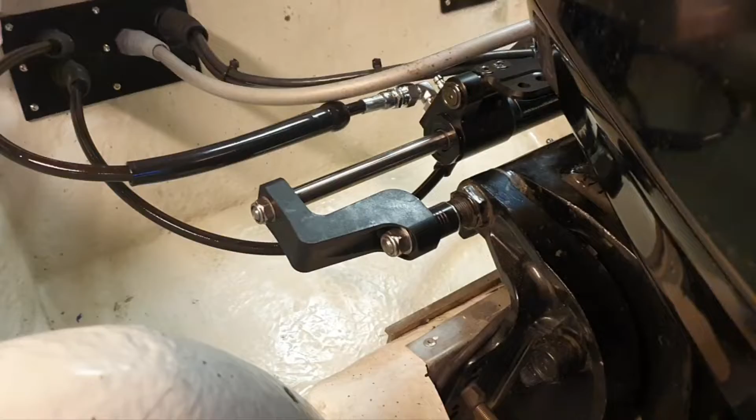Guys, if you came here for the how-to, well, I'm sorry. In this video you will see all the bad things you can meet on the final filling and bleeding of the installation of the SeaStar hydraulic system.

In the previous episode everything was fine - the cylinder installation, autopilot pump, helm pump, it was easy. We ended up with that in the previous episode. Here we're supposed to put hoses, pipes, fill the system and enjoy. Well, however, it's not the case.

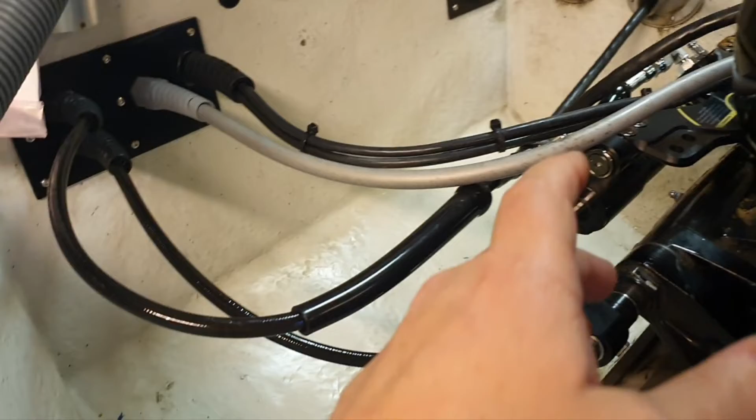Let's start step by step, from the hoses first. So guys, that's how I did strain reliefs for hydraulic hoses for SeaStar, and you can see the link in the description below where I did this panel. So I have electricity to outboard. Here will be a fuel hose.

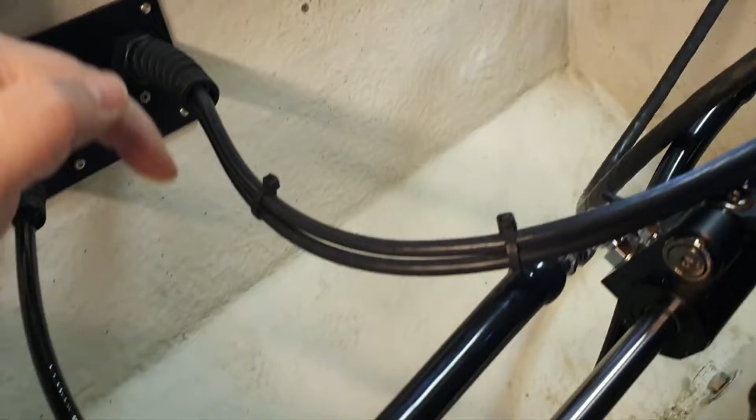See the link there. For hydraulic pipes or hoses, I have a concern. I figured out the best position for them, in my opinion. But still, because the original SeaStar hoses are not metal reinforced, let's say they are terrible. If you watched my previous parts, you can see how easy it is to damage them, how easy to bend them. So I have a big concern about this place where I fixed them. I cannot tighten them strongly because I'm afraid I will tighten too much and oil will not go through. And also I'm concerned that this frequent movement will finally bend and damage them. So it's really good to have metal reinforced real hydraulic pipes, hoses.

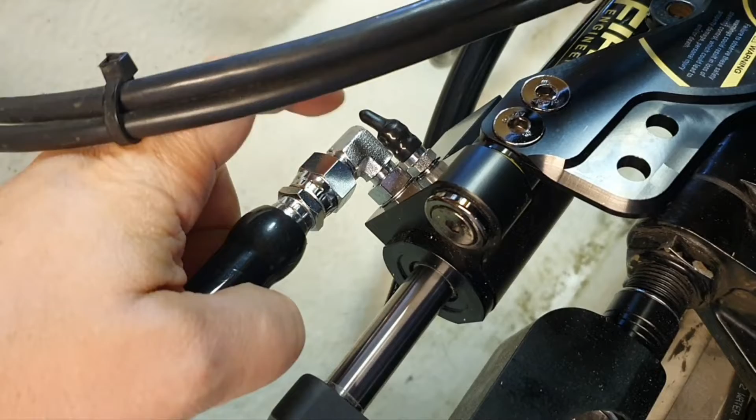So SeaStar supplies these Japanese hoses and they are, let's say, bad. I didn't put this strain relief here yet because I want to check for leaking in that part when I connect everything there. So otherwise, that's how it works here. Look, really nice, and everything would be good enough if these pipes were metal reinforced. Unfortunately, I realized too late how bad they are.

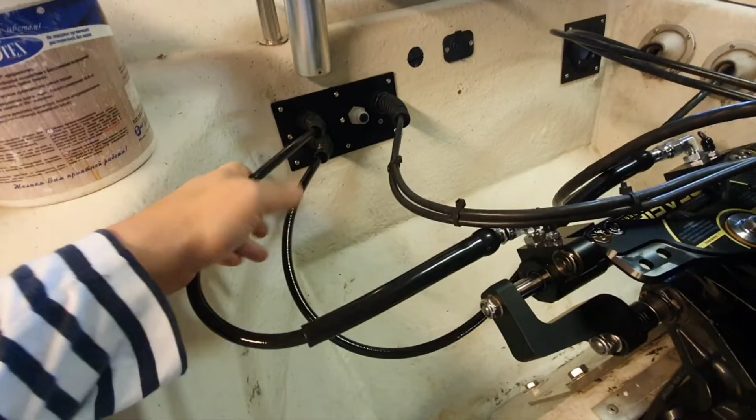Otherwise, I would never buy them actually. I would just buy the cylinder - this I liked a lot. And then I created my own hoses, but now it's too late. So let's see how it works. I hope no damage happens during driving. I think after one season I have to check the connection there. So that's it. Now I should go there, put the pipes through the side of the boat and connect it there.

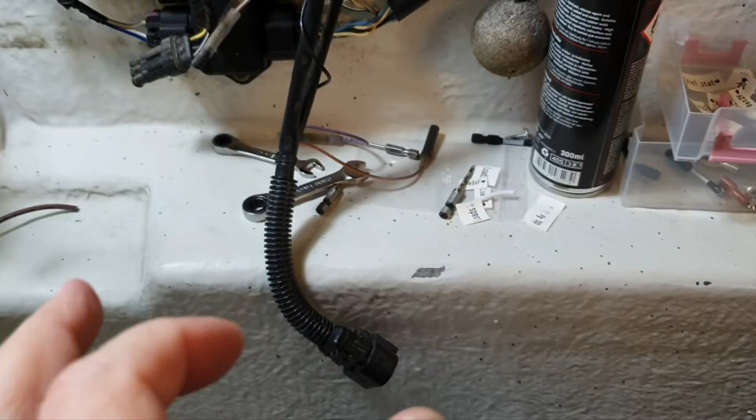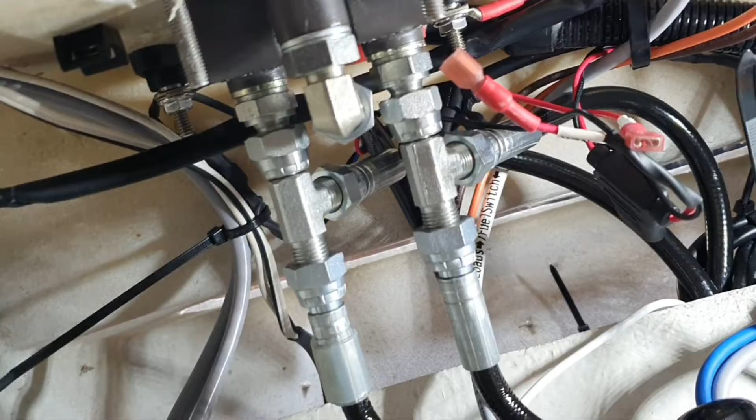So guys, I provided pipes or hoses there. Well, I don't remember what I said in previous frames because I'm recording this after a few months. I don't know what was recorded before and how I will edit it. But now I provided hoses here, installed the helm pump, connected all things, and here the challenges began. Those things are covered in the previous episode about this hydraulic system and autopilot installation.

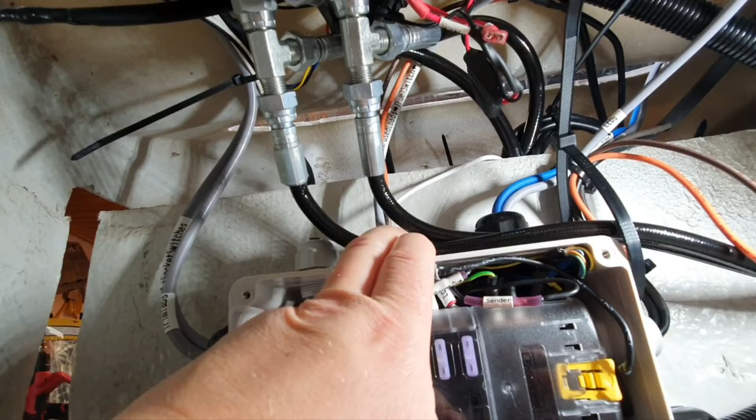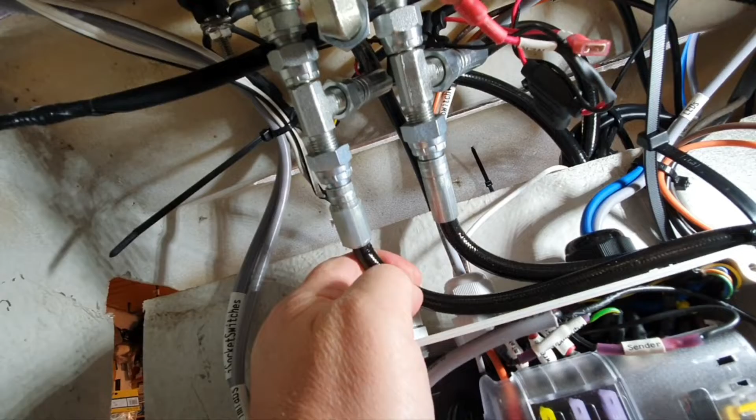So guys, these NITTA MOORE Japanese hoses that are included with this set are real junk. Well, if you don't believe me or don't want to believe me, I don't care, because they are real junk. I told you, and I have shown you - you saw in the previous episode how I damaged a few of them by just a little bending, and here again I have a problem, a challenge. I have this angle here, and they are jammed again, so they can stop the oil liquid from going through, because they are not metal reinforced - they are plastic, just plastic.

I have changed all the other hoses, the short ones - all this I have changed, and I made them here in Finland in Wurth. Well, it's covered in previous episodes, I don't want to repeat it, but this long one I decided, okay, I will not change them, just put these British standard fittings, and that's it. Well, it was a mistake - I would really need to change them.

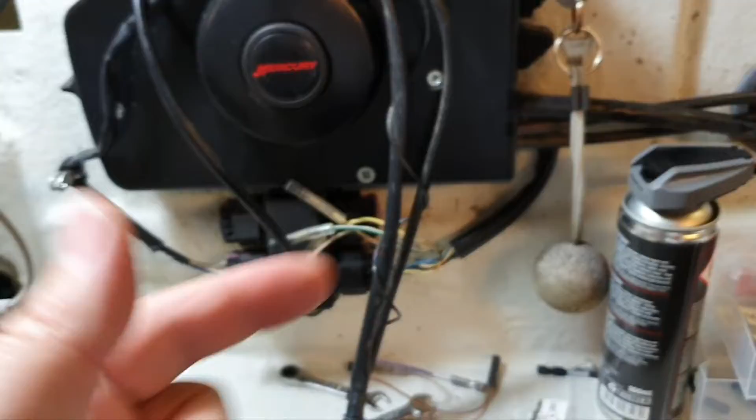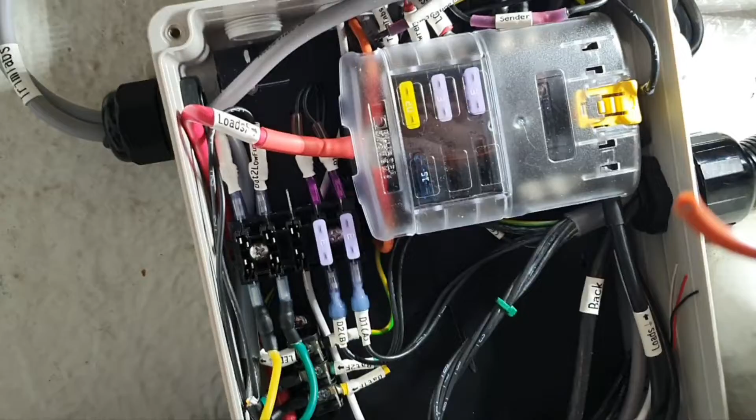And if you decide to buy a SeaStar hydraulic steering system set, that looks not bad actually. If you watched my previous episode, that cylinder fits my Mercury outboard quite nicely. So I think in general it's fine. So don't buy the set with the pipes - buy the helm pump, the cylinder, and do all the pipes yourself from real hydraulic pipes, not that Japanese junk. Guys, I never say Japanese junk, usually Chinese junk, but this is Japanese junk.

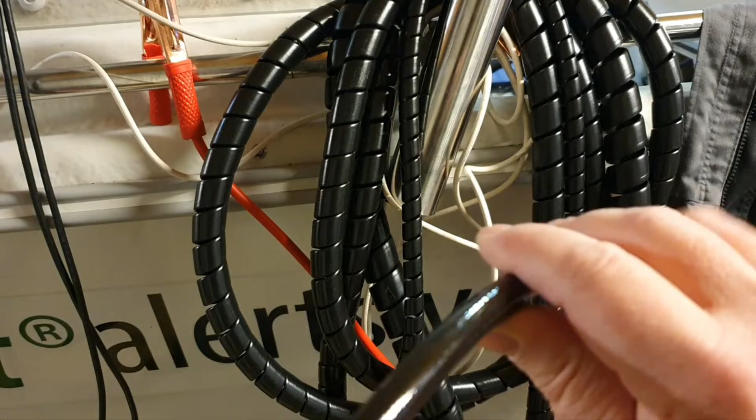This stuff is here at minus 30 for a day. Guys, it was NITTA MOORE, made in Japan, hydraulic hose pipe. It comes with the hydraulic SeaStar system, and it seems that the Japanese know nothing about Finnish winter. It's easy to damage, it bends very difficult in cold conditions. It's fine in a warm place, but you can damage this even without cold, because it's not metal reinforced, it's just plastic. So guys, never ever use this pipe in any solution - actually, replace them immediately.

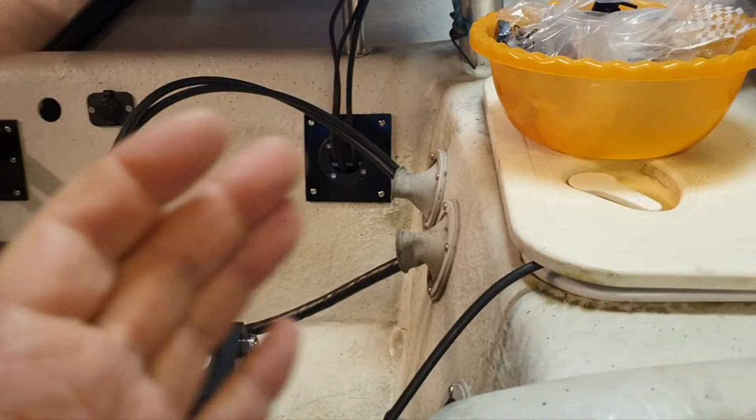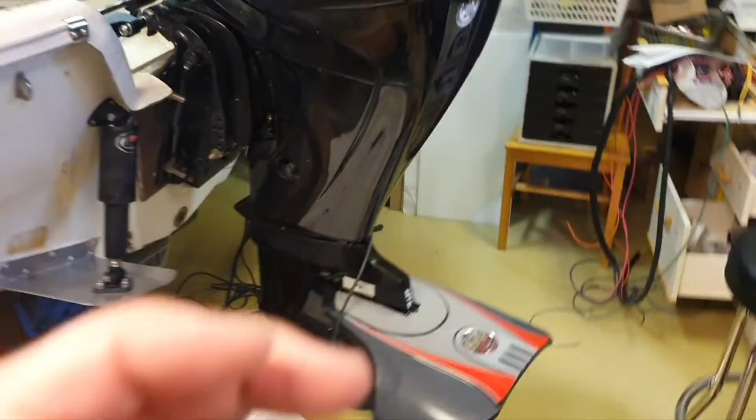Epic drama with filling and bleeding. I cannot tell, just bleeding and filling. It's really epic drama. If someone tells you they are able to do this with just a couple drops of oil, well guys, you are a gold medalist then. So, impossible.

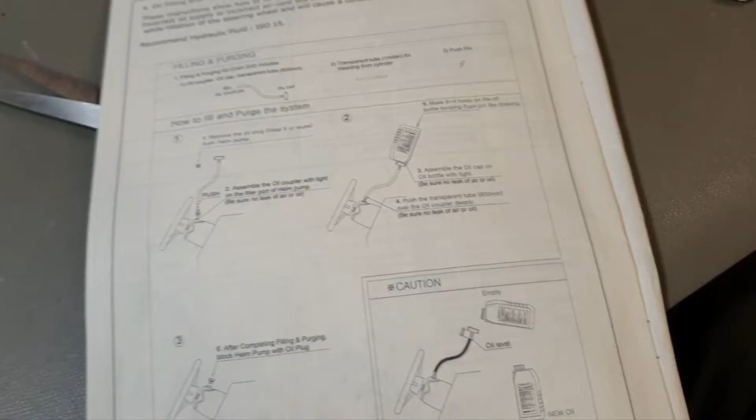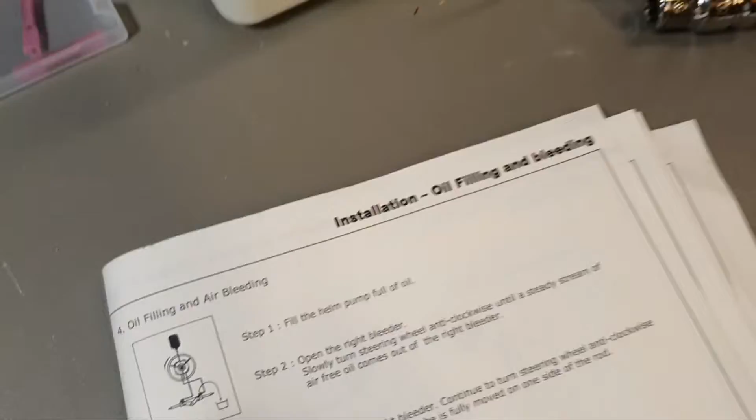Yep, so okay, step by step. Let's start from the user manual. Yeah, that is instruction for the end user, not a service manual for service engineers. Yeah, it should be quite a clear message here how to do this. However, chapter 4, oil filling and air bleeding. Again, chapter 4, steps 1, 2, 3.

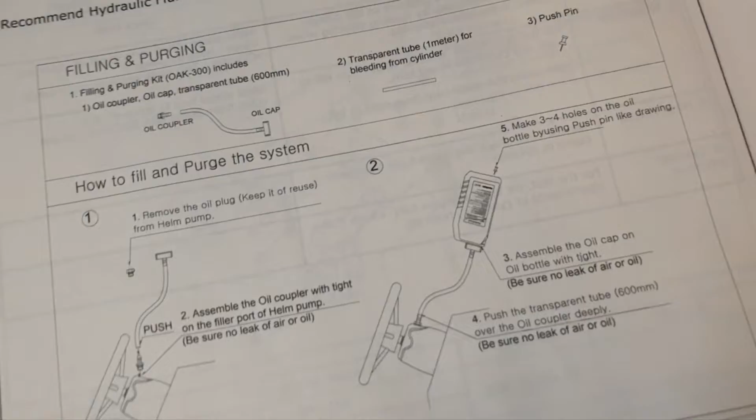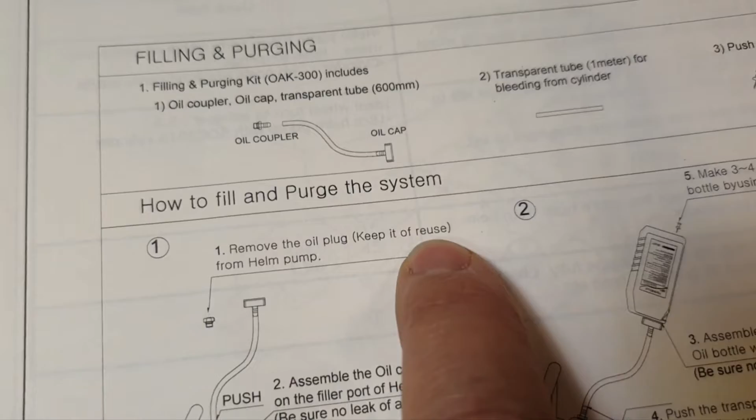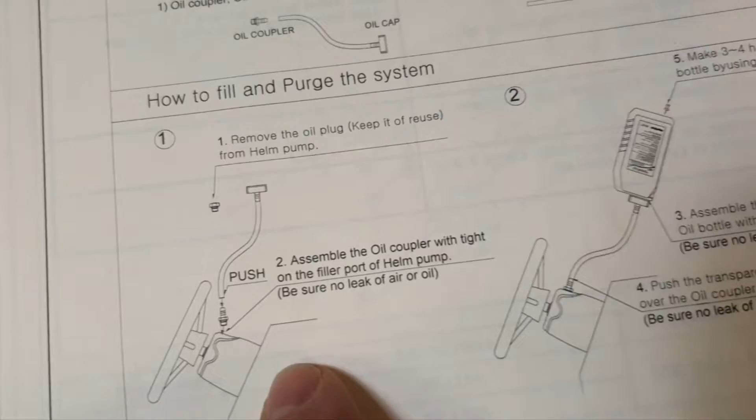So, okay, well, here about the oil coupler, what is included, like keep it of reuse, remove oil plug, keep it of reuse. For me it sounds like never use it again. Well, my English is also not perfect, but I think they mean keep it for reuse. Yeah, so at least I don't make such serious mistakes.

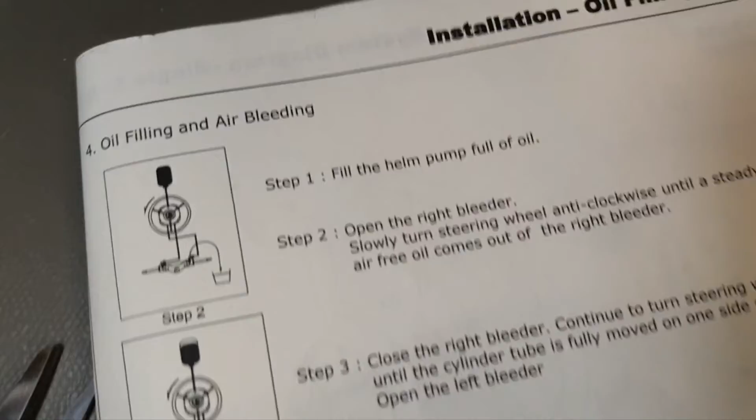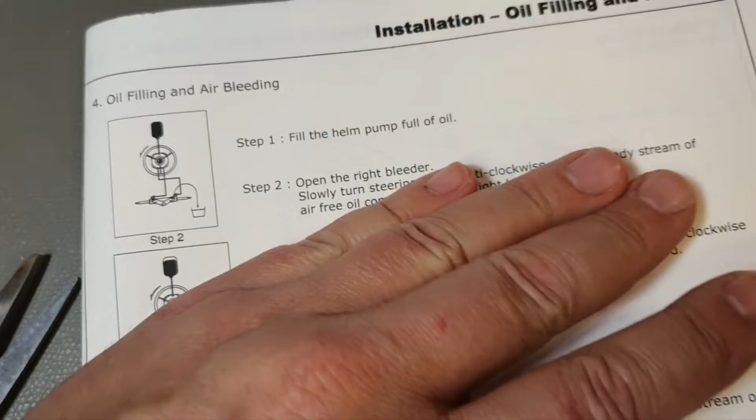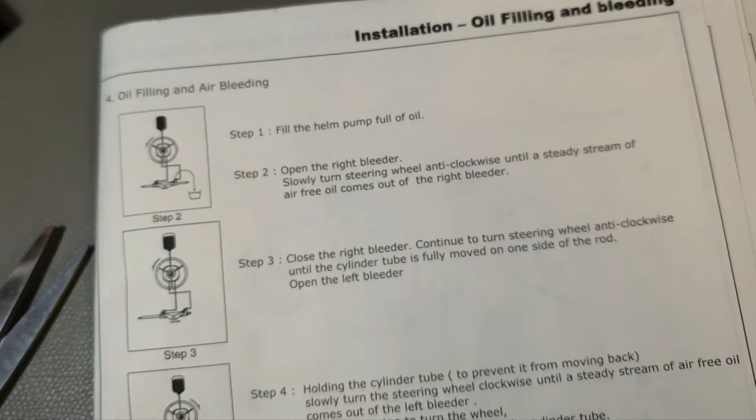Well, okay, so something about filling. Yeah, picture of oil here, and then again step 1. Step 1, fill the helm pump full of oil. Step 2, open the right bleeder. So open a different bleeder, so opening is the next step. Fill the helm pump full of oil. For me it sounds like I don't need to open anything. So is step 1 covered here, or is it just general information? Quite unclear.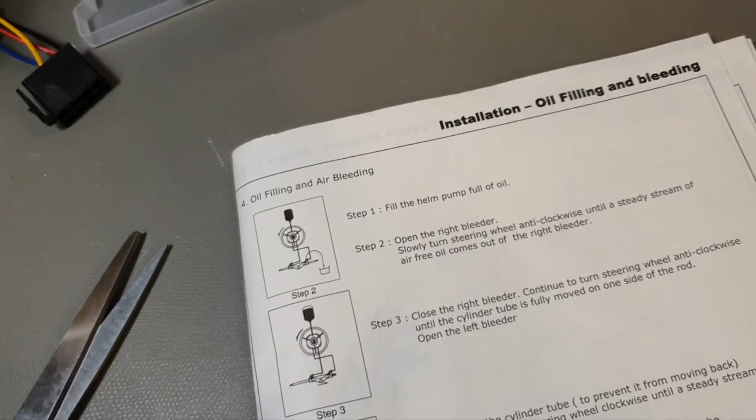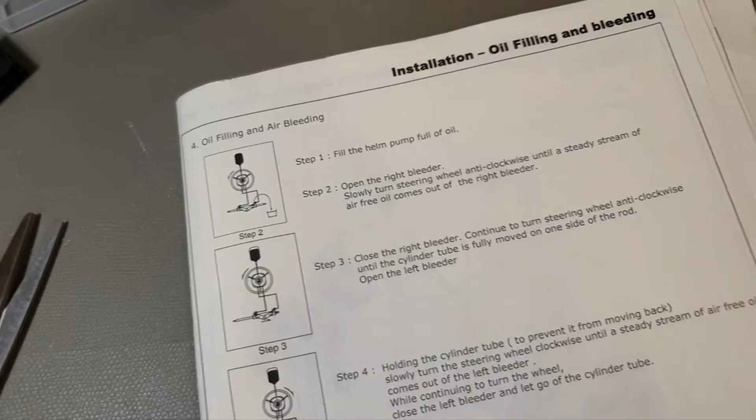So people who say they have a detailed user manual, well, maybe after you've already done this job twice or a hundred times it's a clear user manual for you, but for people doing this the first time, it's not clear.

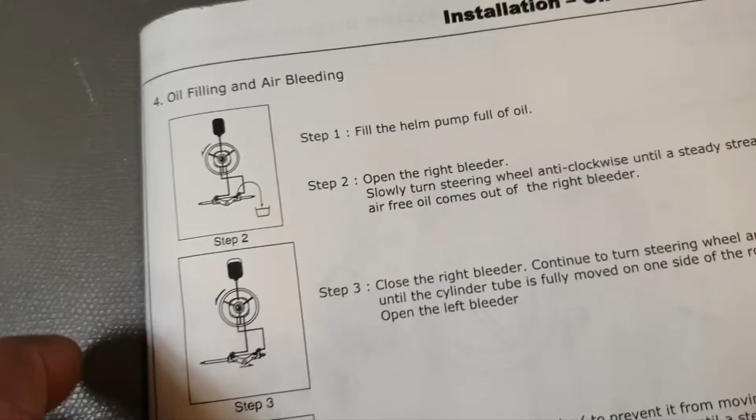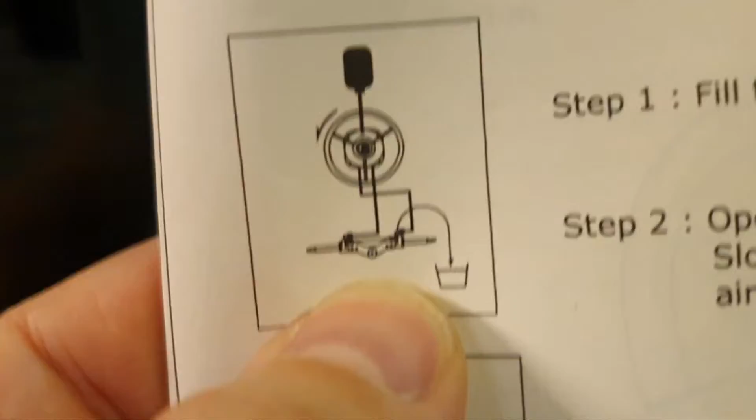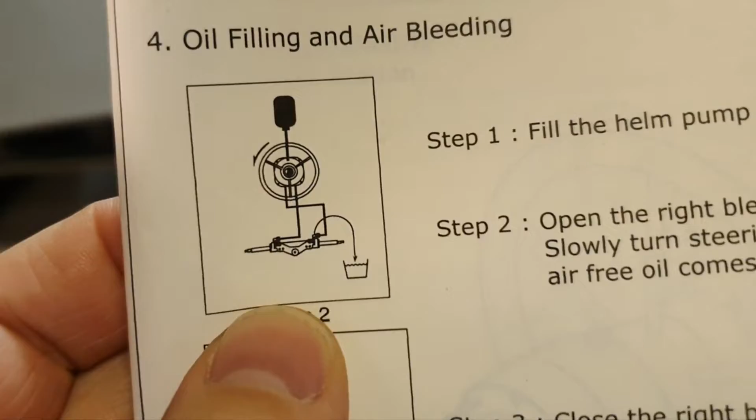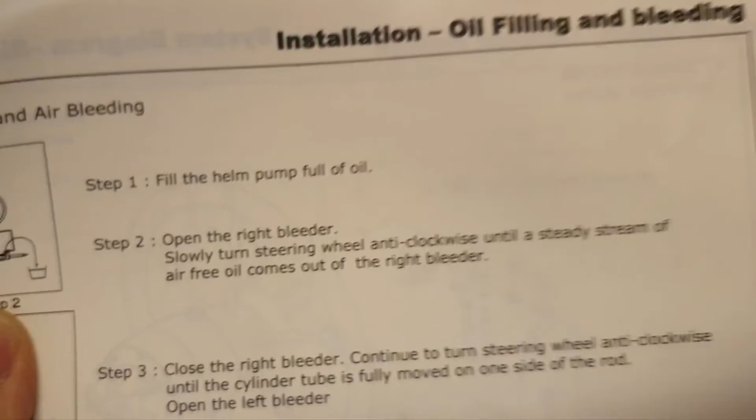It is good, look. So when they say right, it means we are from that position. Look, this is the cylinder and it is here like that. Yeah, the wheel is there. So from that position, again, left port to the right, right port to the left. So right side is here, counterclockwise here. So that's how you read it. At least this is clear.

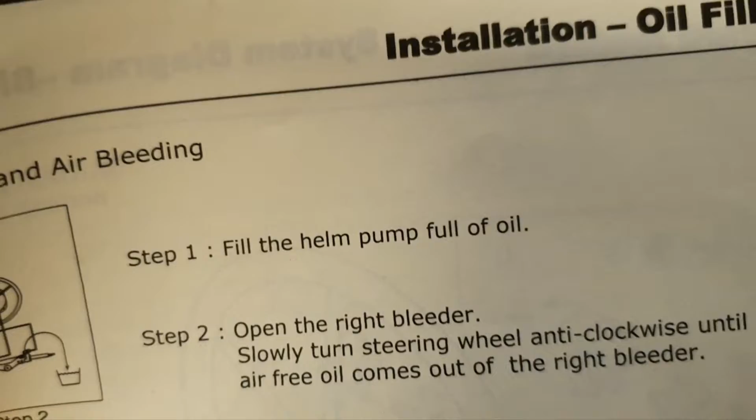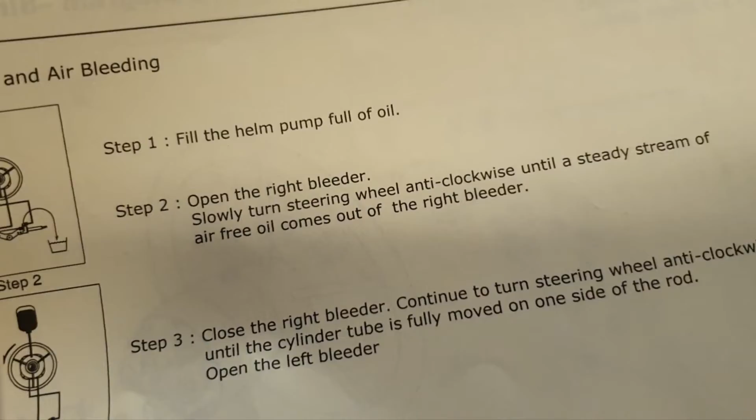And guys, I did how it said here. I tried to fill the helm pump without opening anything. I will soon include a video, merged parts with voice over to explain all the things. Then, when you try to fill the helm pump, it didn't work when I tried, then you should open the right bleeder. Yeah, so it's that one.

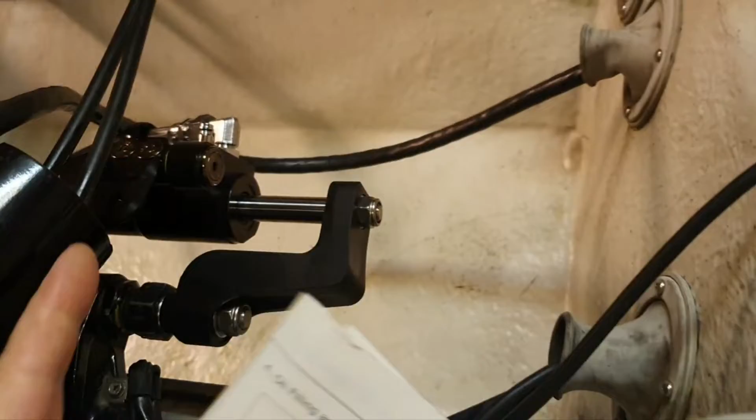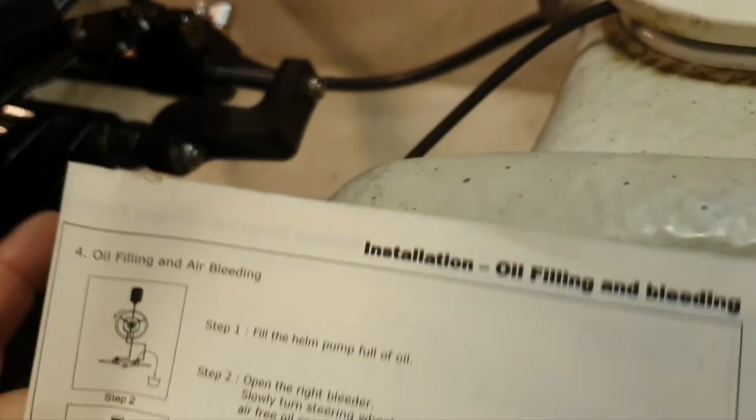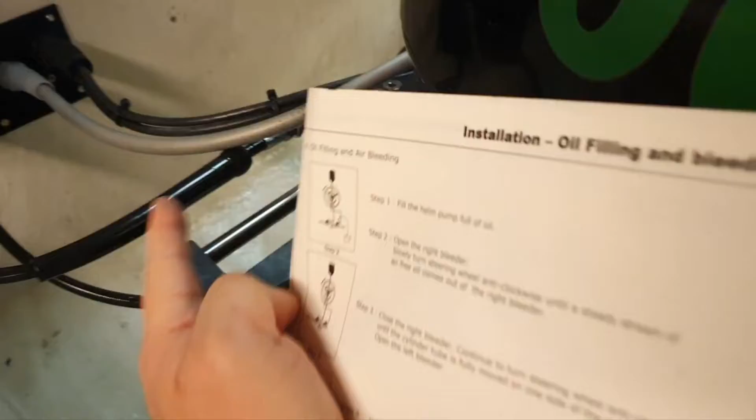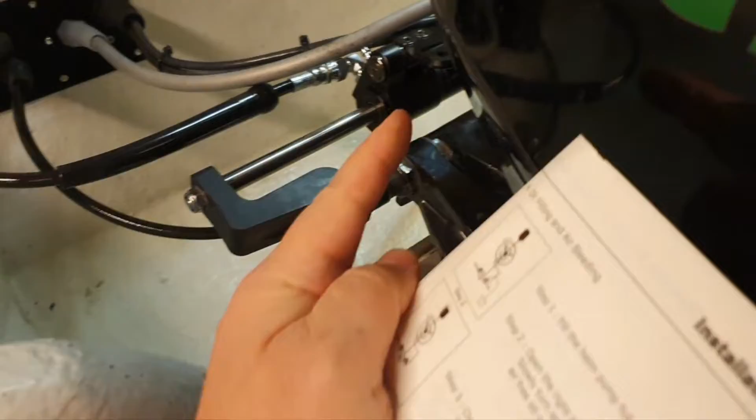And rotate counterclockwise. There will be air bubbles, you should remove them. Then you close it and continue rotating, steering until this tube hits here. Then you go open the left one and hold this tube while steering clockwise for all the next steps. Then you close it and continue rotating and the cylinder will go. Then you come again here and repeat the procedure. All these steps are described here.

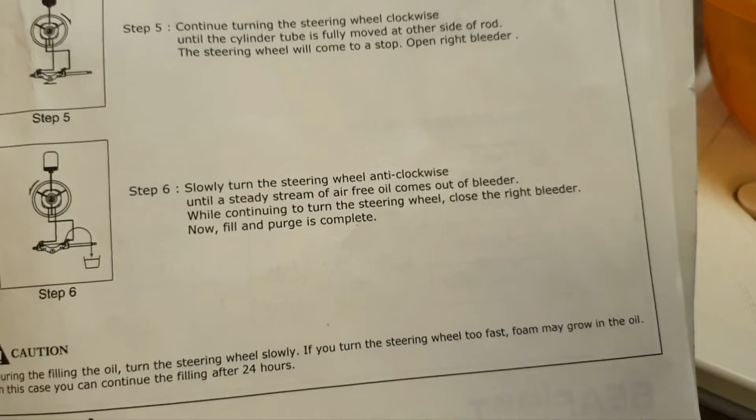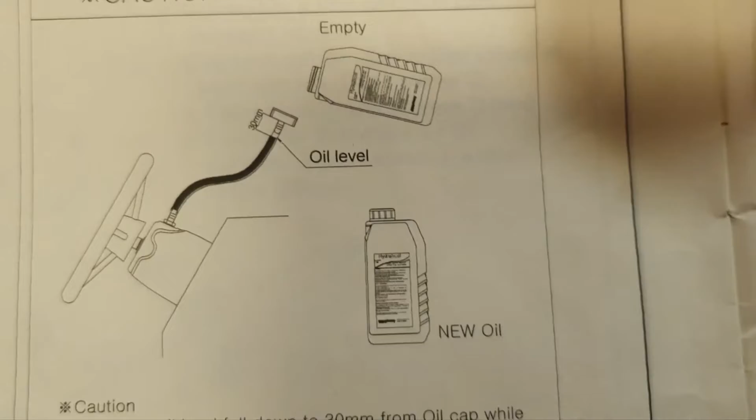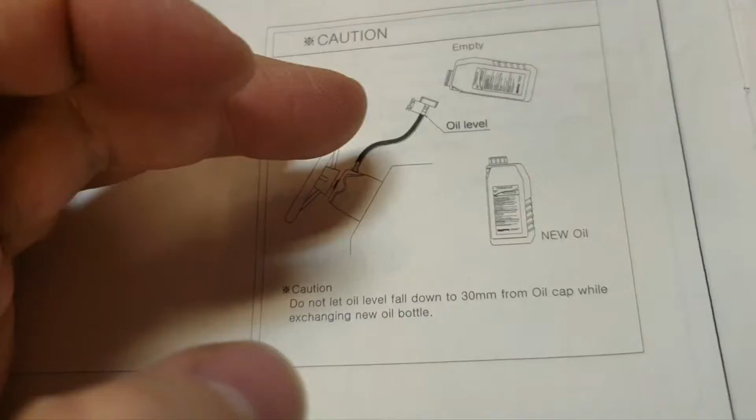Yeah, I wouldn't call it simple. And guys, they draw it like you can just put the empty new oil bottle here connected. It's really inconvenient, extremely inconvenient, to have the oil here and unscrew it, since all the oil is here, especially because you have holes on the bottle for the air, so you cannot put this bottle down anymore.

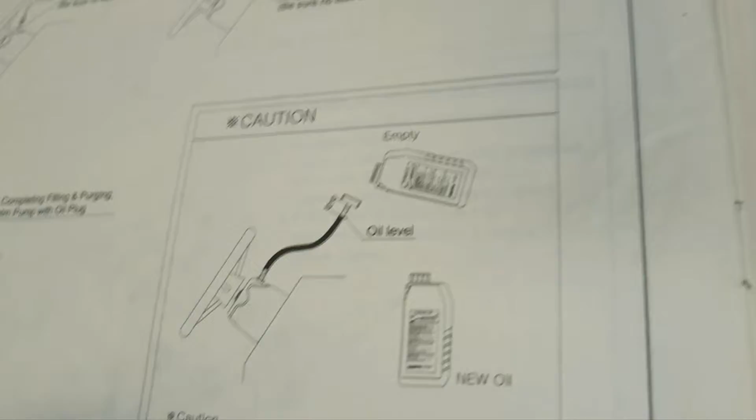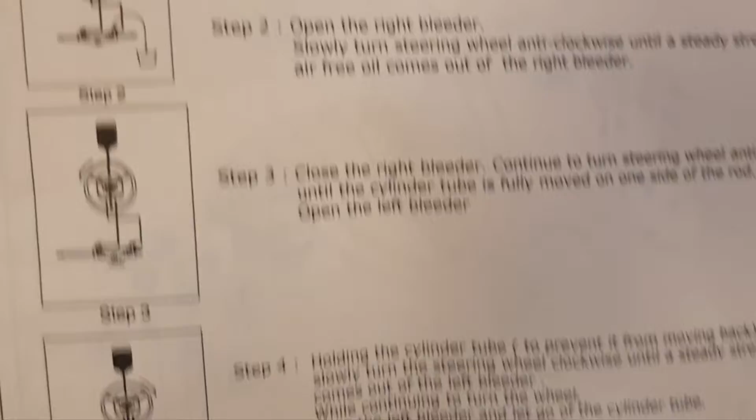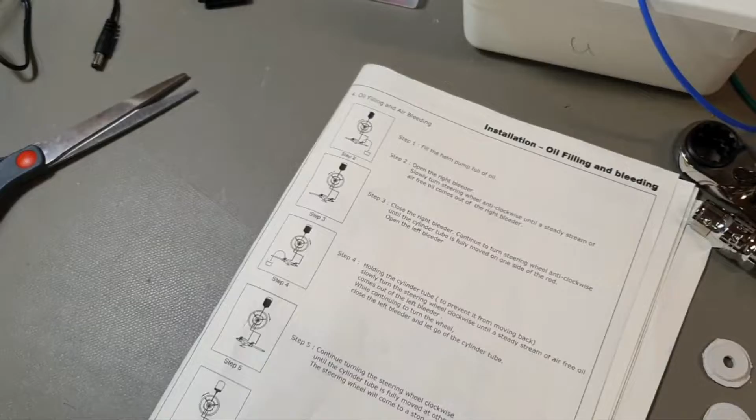So I decided, after all, I just cut off this. And many times I go in the boat again and fill it back, because there were so many air bubbles. I think actually you first immediately need to open the bleeder and then fill anything, I think. Well, I don't know, let's see how it went.

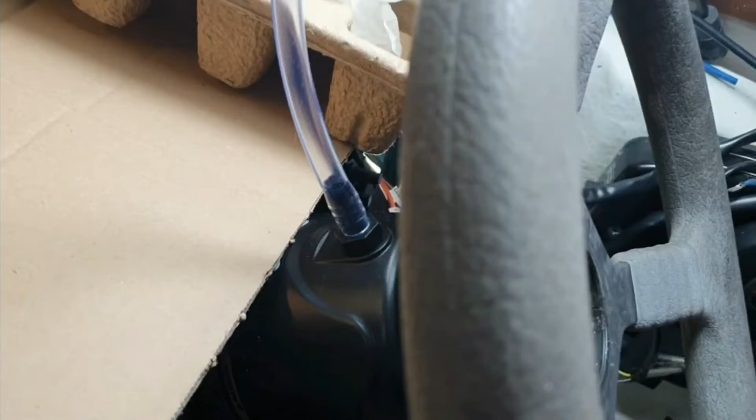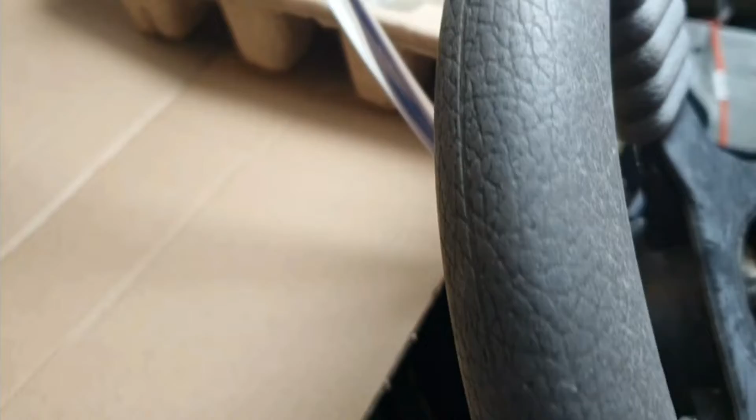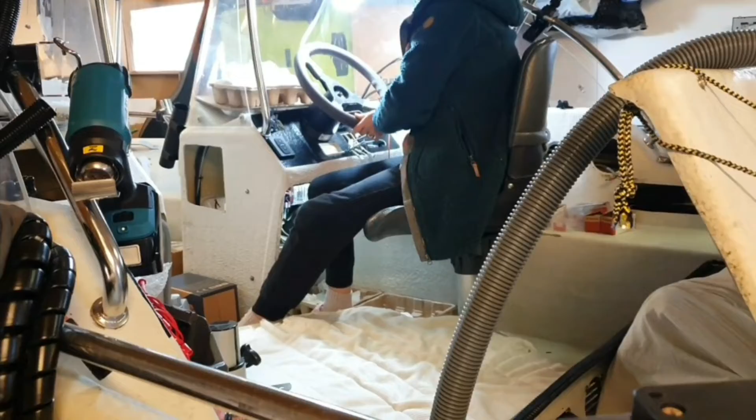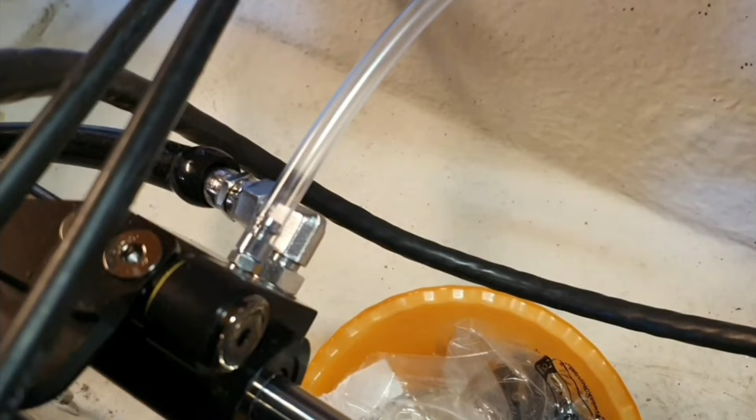Yeah, so we are filling the helm pump as said in the documentation. Now we open the bleeder. You hear air, no oil yet, no bubbles, only air bubbles. So we continue rotating anti-clockwise and waiting for the oil. Still not yet. And now here it goes with small little bubbles. According to the user manual, we actually can already close the bleeder, because it's solid oil.

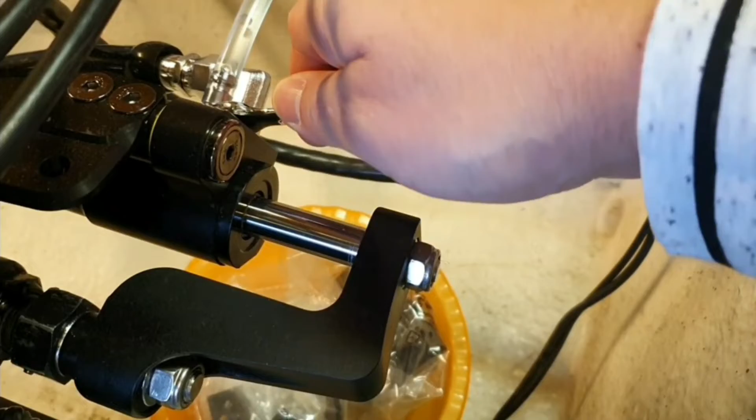I show you this quickly, but it took a lot of hours. So, look, we close there, nothing works. The ram doesn't move, so we open again, and we again see the bubbles, more small bubbles. Then seems everything okay. Oil is going to here.

Now again, no bubbles. So we continue steering. No bubbles, yeah, nothing to do more. So we are closing again, and the ram, the cylinder should move now when you continue steering according to the user manual. But it doesn't happen. So we open again and again bubbles.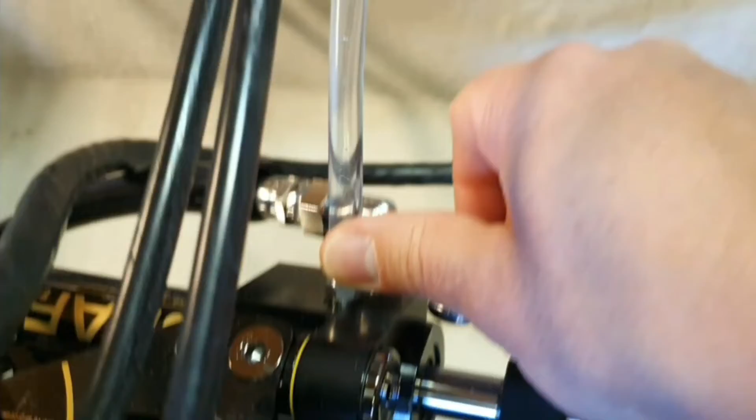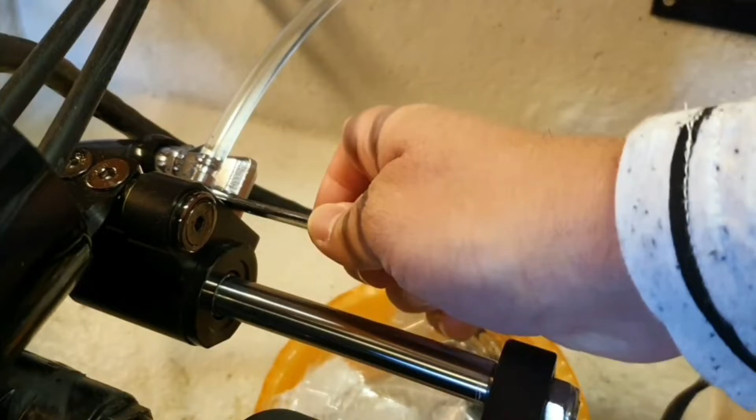But if we don't close and just continue steering, then no bubbles. So we are doing everything according to the user manual. Open again and again, this dance with the bottle, oil here, oil there, everything in the oil around. So no bubbles again after a few hours.

Nothing to do with the open bleeder anymore, because no bubbles with the open bleeder. So we close the bleeder. Yeah, oh, now the ram is moving, but somehow really slow.

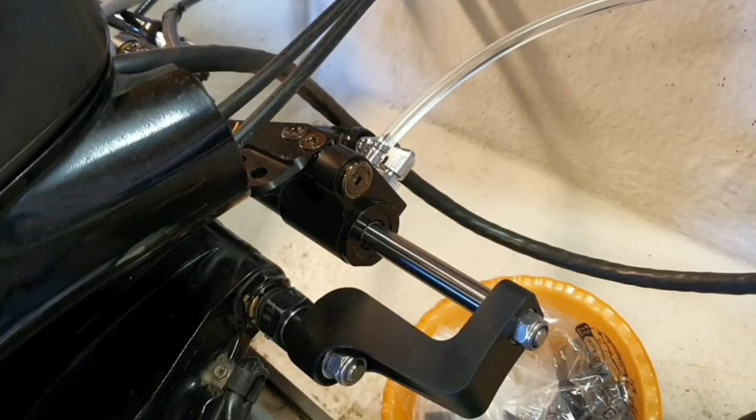Okay, let's go to the left side. Let's try to the left side, because here is something not exactly correct.

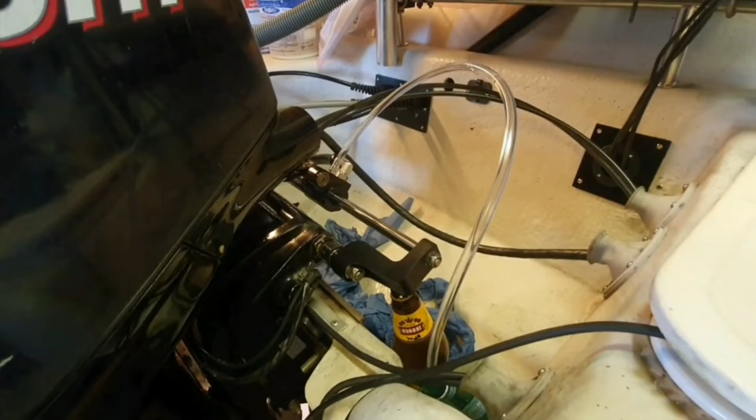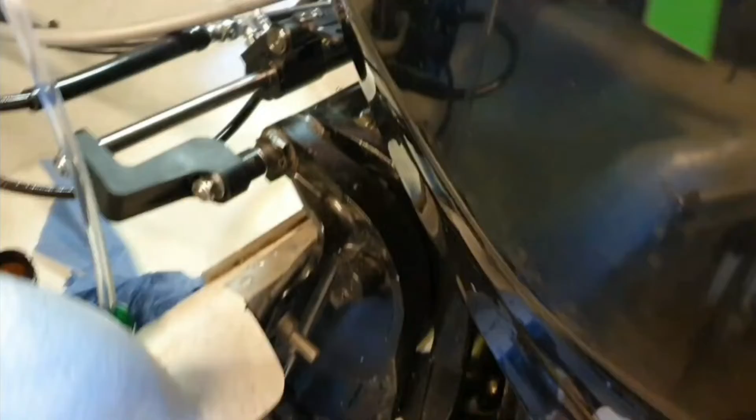So again and again, and it lasted a few hours, and you can see. Then on the left, okay, bubbles here. So no bubbles anymore. We hold this ram, as I said in the user manual, from moving here. So when no bubbles again, we continue steering to see that really no bubbles. So we close the bleeder, and the cylinder is moving, but again moving somehow wrong.

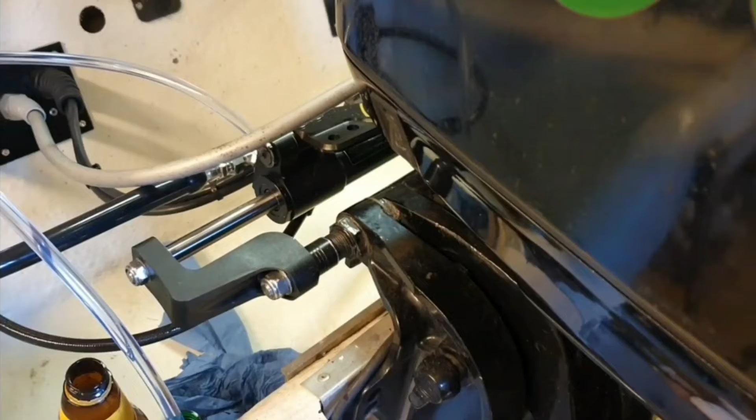So we did this procedure, it took half a Saturday. So if you keep the bleeders open, then there is no bubbles. If you close them, then you don't get the cylinder rotating well. When you open again, bubbles. But then we open again, and haven't seen any bubbles anymore. Still, it doesn't work right.

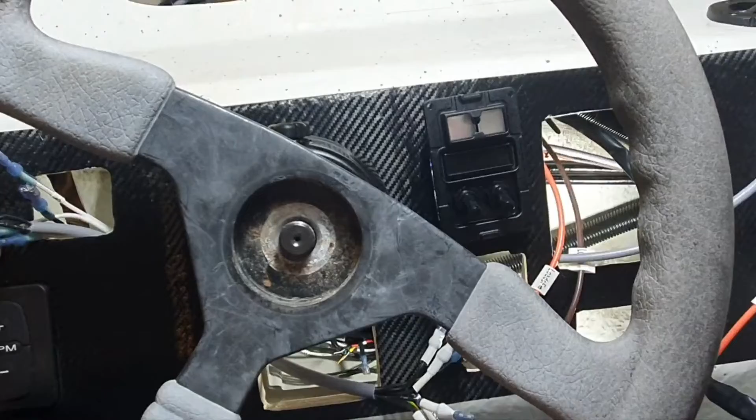So guys, we filled and bled it. Terrible experience. And now look what we have. Guys, I didn't have that play even in my mechanical steering. No, it's not about airs in the system.

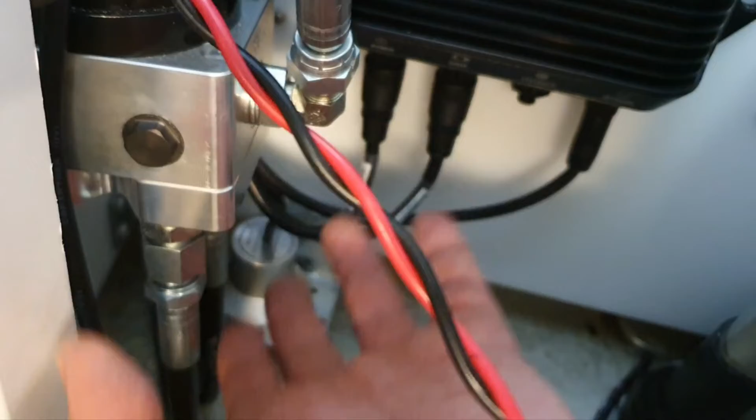We spent half a day for filling and bleeding. Another half day I spent again for bleeding. There is no air bubbles. I was thinking that the problem was in this autopilot pump. I disconnected all fittings here to allow the oil to flow. Again, I was thinking some problems with air.

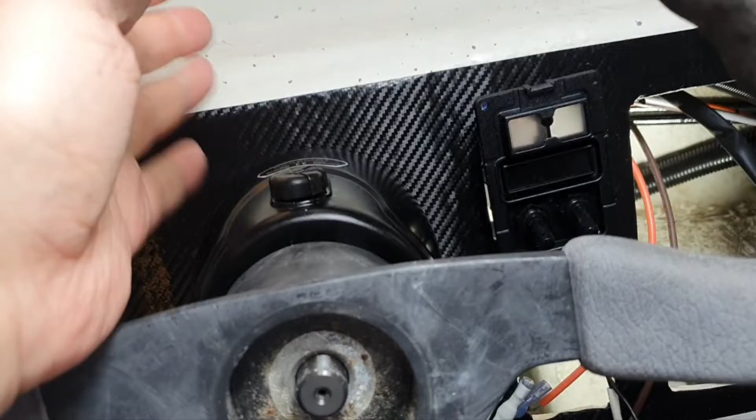I will show you soon the test of the autopilot pump. I don't know what is wrong here. Is that helm pump damaged or something?

And guys, nothing about 5 from port to starboard full turns. No, it's about 8 or even more. I don't know how I can steer. Look. How I had, if I remember, 2.5 or 3 before.

And guys, look, so now I can continue rotation, yeah, with some resistance. I don't know what it is, what's wrong here. All this stuff is brand new, yeah.

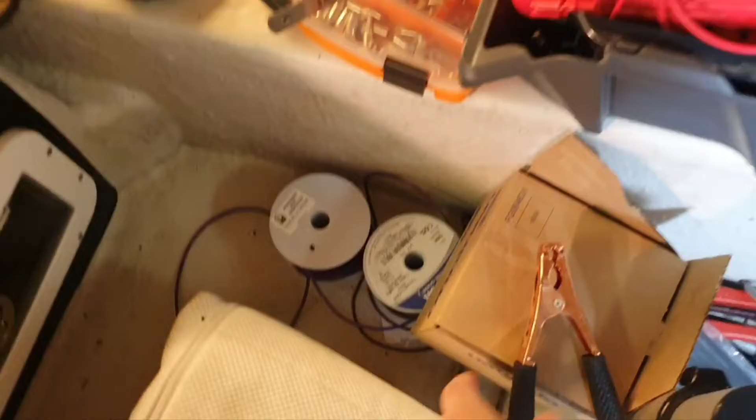And now guys, look, wait a moment, I put it in the middle. Look at the autopilot pump. I was thinking that this is somehow adding to the problem. So I tested it from a 10 ampere power supply. It didn't work. It requires really a lot of power. I will now be shorting here.

So that's, by the way, how you can test the pump. You can just provide 12 volts in either direction, reversed or forward. And look, look at the reaction, how quick is it. So everything is fine, and now it's reversed. So that's the way. I have seen some people ask how to test.

The pump is just a motor with 2 cables, black and red, and the motor works like when you connect in one or another direction, so it rotates one or another direction. So that's how you test. You just plug it to a powerful source, to the battery directly. I tried from the small battery and from the power supply 10 amperes. Still doesn't work for some reason. I don't know. Yeah, okay, maybe for the motor starting.

Now look again. So it works, it's steering. I think that the autopilot will be fine, but I don't know what to do with that stuff. If you know, please help. Hear the click sound there.